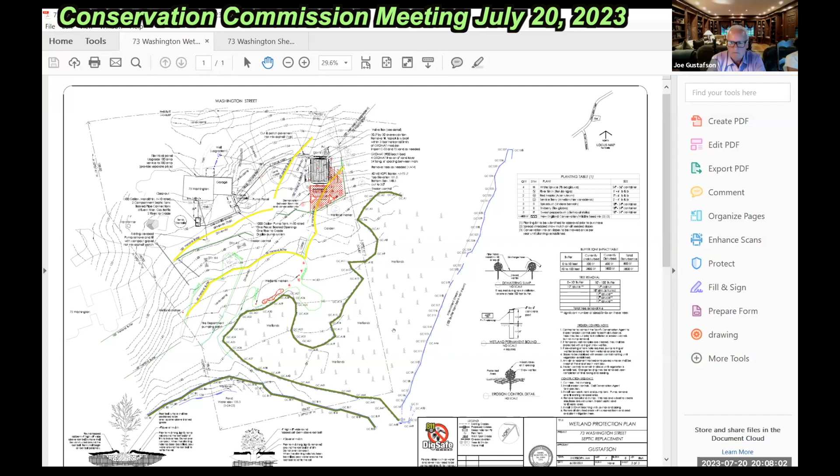Let's go back to the deal, getting the planting numbers solidified and some species, because as was said, you can come back to us with some changes in terms of what the species are based on what you see out there. As long as they're native and match the canopy thing, you can work with the agent to get approval of that. It does not have to come back before us.

So where we are now is that we have essentially 6 trees, let's see, is it the 6 trees here? Yes, we've got the 2 above, the 4 down to the 6 trees, and the 2 service berry, the river birch too. We've got 7 trees and the 2 service berries. We have 9, we have 11 shrubs, counting the service berry as shrubs.

Basically what we want is the red maples are good, all the shrub species choices are great. The issue is we want canopy trees, the white spruces should be swapped for something more likely to survive. Right, the white spruces are canopy trees, but they're not native to Massachusetts and they want to be in the northern mountains. So we just need to swap out, can be just red maple. We can specify that as a condition. We don't have to have a change plan necessarily. Right, right, that's the idea.

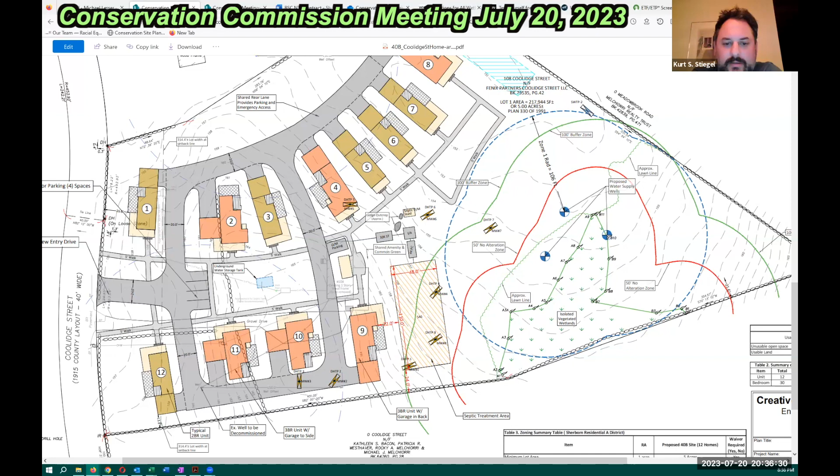I don't see everybody on my screen, so speak up. Hey Michael, this is Kurt. Yeah, no, I think the points you raise are good, and I would support you and Courtney and Joyce writing a letter to Mass Housing. Okay, I agree, I agree.

Okay, so the septic flow, we have the water supply. Can't remember what my other point was, was it just the grading issues? We don't know what the grading is. Did I have a fourth point? Without having to listen to the minutes, I should have been writing them down. I don't think they're increasing the amount of lawn. Okay, so maybe it's just that.

Do you want to mention the isolated wetland, Michael, or is it really so insignificant? No, that is the issue, but we'll just note that it is a wetland. That's not an issue at this point. Okay.

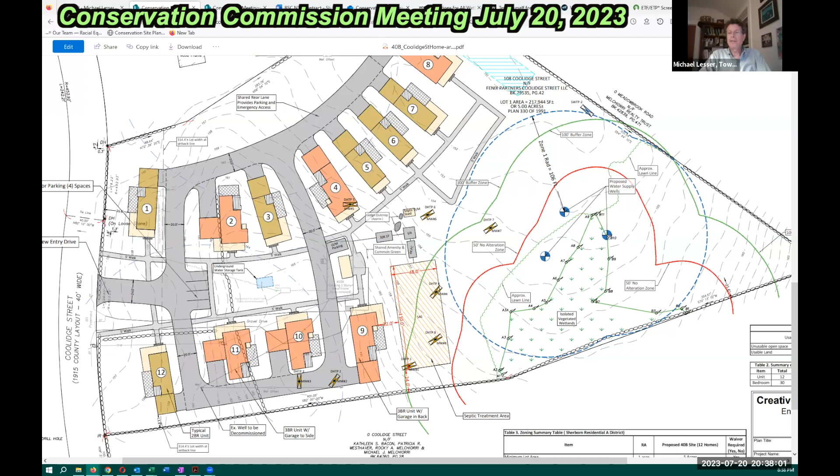I move that the commission submits a comment letter with the issues noted, to be written by Courtney, Michael, and Joyce. Do I have a second? Second. Okay, any further discussion? Roll call vote. Michael, aye. Steve? I think I heard an aye. Kurt? Aye. Courtney? Aye. Okay.

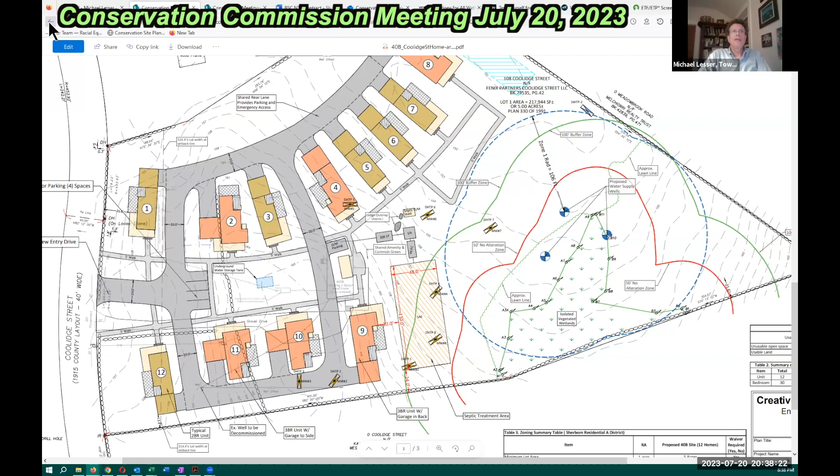Now, going back to this other project on Farm Road.

Now, I'm going to just show this for a second here. This project is further along. They've made an application to the ZBA, and the ZBA is starting on August 1st their hearing process, for which they will decide whether to grant a comprehensive permit or not, and if they grant a permit, what would be the conditions that are part of the permit.

Part of the application, for everybody to know about, is that since the ZBA is representing this 40B hearing, the ZBA is our representative for any other local board in terms of local issues, either regulations or other concerns. What happens is part of the application is a negotiation in a way. They submit a list of waivers from all of the local regulations that the ZBA has to consider whether they will grant. These are often for setbacks and such.

As you can see here, they have gone through here, I think there are about four pages of waivers here. This is related to the rules of the comprehensive permit. I don't spend a lot of time on this, but they're asking for waivers for some time limit stuff. Then they go into waivers from the zoning bylaw.

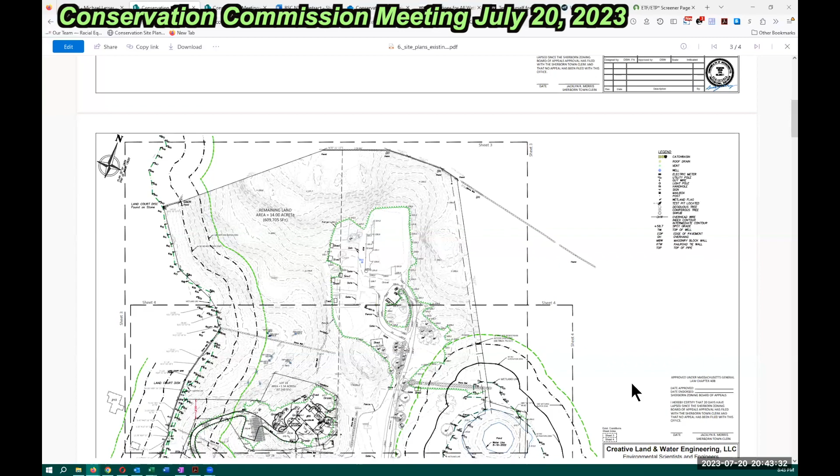I can tell this is the best page, maybe. It's a little harder to read, although I think this is existing conditions. Forgot to, I think it's maybe just the first. What we need to prepare for, I can tell which is the best one to look at for just an overview, but maybe the first one is, I forgot. Oh, here we go.

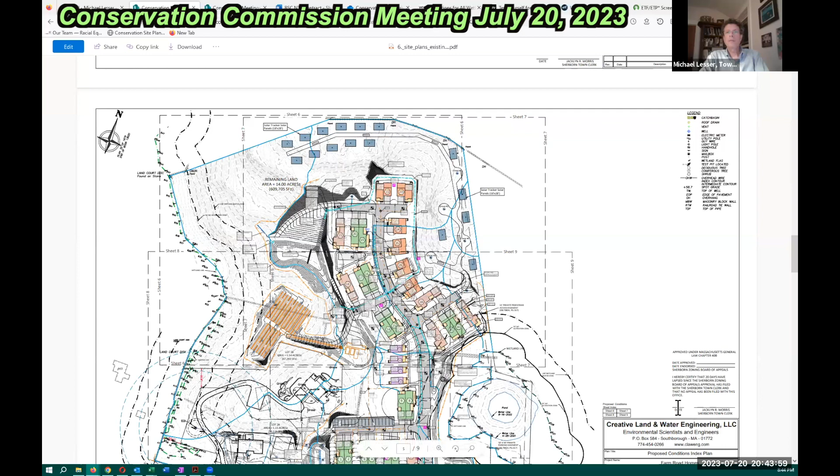This is an example of the whole project. There are wetlands on the left side, and there's another isolated vegetated wetland here, and a land subject to flooding on the east side here. Which actually, I guess this is almost sort of north-south. Oh yeah, you can see it up here.

This one here, there are concerns about the fact that there's a road that's in a buffer zone here, to this here, this is the wetland here. So we have buffer zone and there's a road that's going through it. We have some concern, and some of the houses, back of the houses are in the outer buffer zone. I think the solid line is the no alteration inner buffer zone, even though this is a 40B and doesn't have to follow our rules.

They have basically tried to keep everything out of the 50-foot no alteration zone, except for maybe a well. I can't tell if they move the wells. Those tend to be more temporary disturbances. And it looks like on this side here, they've kept everything outside of the buffer zone, except they have a very large septic system that is just perched on the edge of the buffer zone, so we have effluent considerations that the best we can do is probably just try to monitor that.

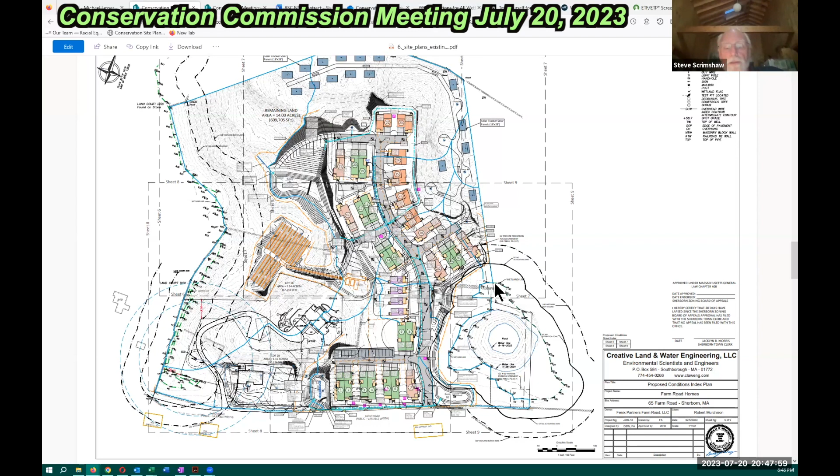I have a question — looks to me like they might be putting fill within the 50-foot buffer zone, around the pond. So they'll be filling in that — is that right? This plan seems to show their fill outside the 50. Well, there's some fill right here, by the erosion control barrier. There's a little bit of fill over here by the septic.

But it's an interesting issue to see how this works out. That would be the NOI, that's the permitting at the state level.

At the ZBA level that's starting up, we have to think about — at our next meeting we'll try to prepare something to think about what concerns we have about this project that may be conditions we want the ZBA to consider putting in at the local level. That's something we're not going to do tonight. I just wanted to introduce this, that at our next meeting we stick it on the agenda as a discussion item to see what concerns we want to raise at the ZBA level.

One other question, if I may — I see that the water line is from April 28th, 2021, and that pond, as we all know, can get really big. I don't know, certainly with climate change, but has it gotten bigger than that, Joyce? Do you know if in 2022 and 2023 that line was farther out?

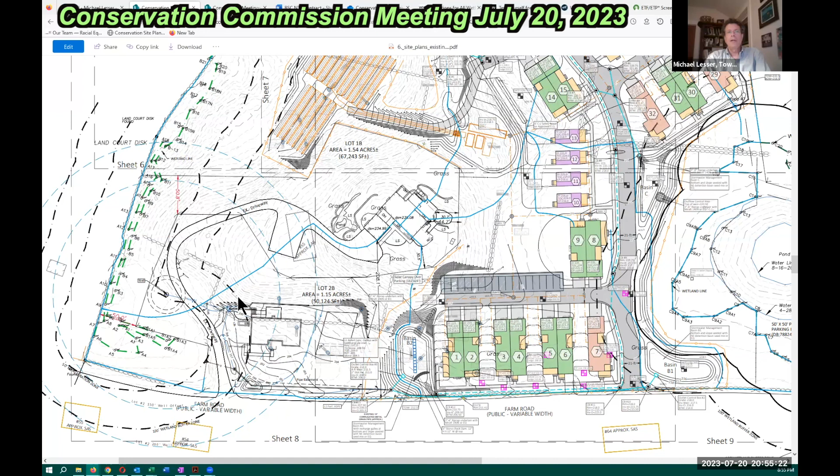Okay, so this will be — yes, go Michael, I apologize, Tom Trainer. Sure. Are you taking any public comment at any time? Oh yeah, sure, no, by all means, since I can't see everybody. Can I point something out?

If you go back to the pond end of the plan, actually to answer Steve's question about sizes — I think most people are familiar with this property just driving down Farm Road. But do you see the current road or the planned road? Yeah, this one here. Right, that's actually about 20 or 30 yards east of the existing cart path, which is all the way over.

I believe I've seen, and I'll have to dig them out again, aerial photos from a year ago when this first came up in the first round of things to mass housing. This pond, which is a little mini kettle pond, as you see from these two dates has a big range in coverage, depth, and diameter — that pond reached the cart path at one point, 30 or 40 years ago, in particularly wet years. So that's actually a question leading to a question to your board.

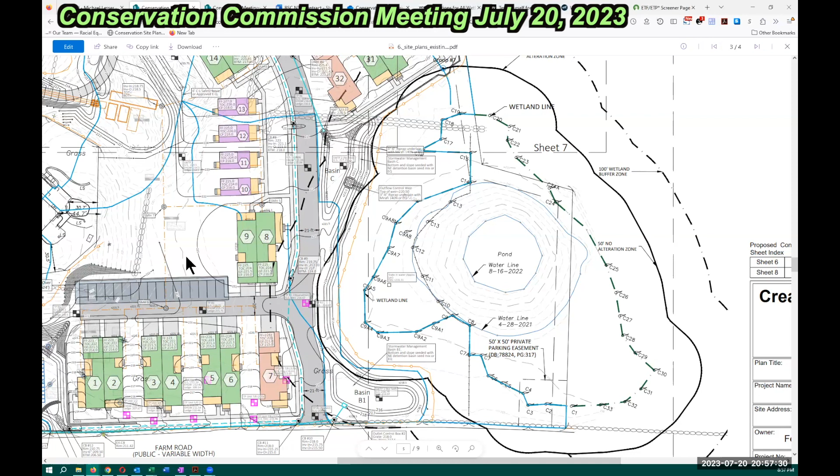You're starting to see ponding at some of those houses. I'll just say that issue—you see the grading that they're putting in here. That's grading the road up to about 220. Oh, they're adding elevation, so they're basically building up to 220.

If you look over here where some of the existing stuff is, can't quite see the outline of the current path, but these are things around 217, 218. What's this existing one here? I can't tell, that's a 220. So I think that's grading—they're basically protecting the road by creating this berm, so to speak.

But that will basically be crimping the stormwater, the flood management capacity. That's what's going to happen. That's where the issue will come up—by curtailing the flow of water that might have gone here at some sort of large, who knows, 50- or 100-year event. It might not flood the road, but where's all that water going to go?

That would previously possibly flood in this area here. To what extent? Because this is 217 down here, and 218—they're basically saying water would start flowing rather than this way, it might go the other way. It actually does go to the right, to the other property too.

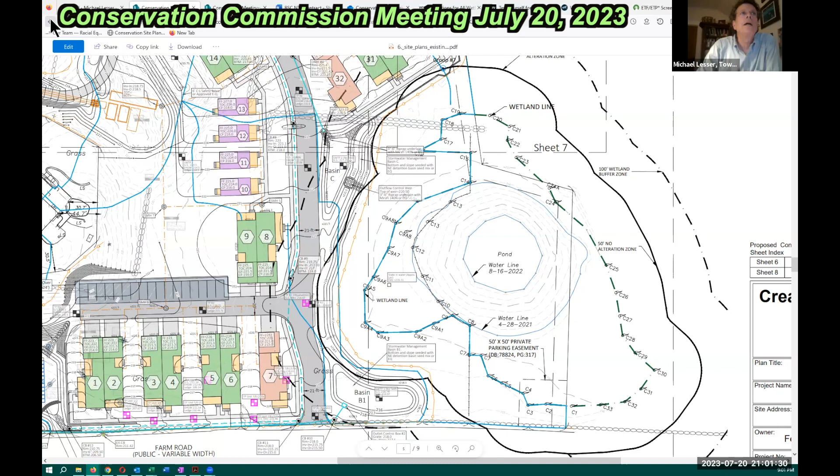So look at this stuff here—there's a lot of files on the town website. In our June 20th folder I'll move it all over. There's this July 20th one too, where I just moved over some of the more relevant stuff for us.

Michael, there's one more hand up. Oh good, well I can't see it. Yeah, Michael, it's Sue McPherson.

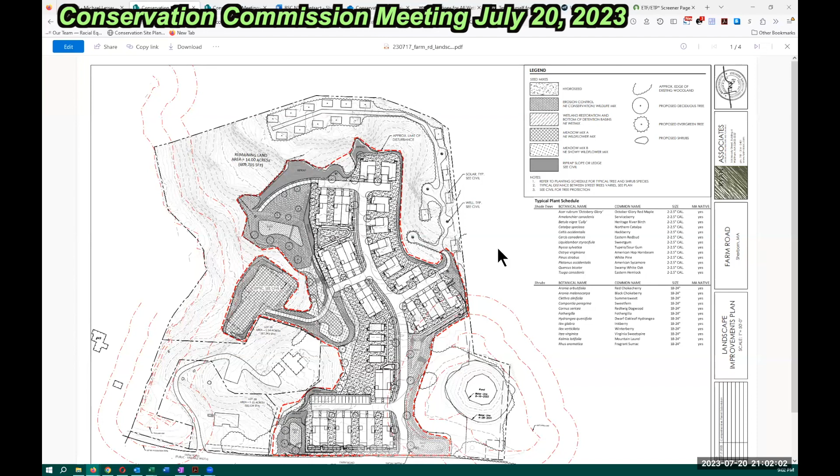On that map that you had, the one thing I would just like to point out—and you may have said this when I had to step away—but on the lower right-hand side of the map, where it had the little parking easement, it looks to be that that's in the wetland buffer as well. So I'm not sure if that's something the commission would want to address.

And you have to go down here through the scenic historic farm stone wall to get to that as well. No, Michael, it's a little square—see the buffer zone around the pond?

Zoom in around there, yeah, it's a little square. It's an easement—I don't know that they're actually building anything there. Oh yeah, this is the easement. Well, in the very beginning, on the deed when he filed this, he's granting a parking area for access. Oh really? Oh, here, okay.

Yes, we'll have to bring that up at the ZBA hearing, I thought, since this won't fall under the state. This is not a state-level area.

But it impacts not only the wetland buffer, but also I think there's some trees there as well as the stone wall. Oh yeah, no, we could raise it, but that would have to be accepted by the ZBA, because we can't do it under the state filing, given that there's no buffer zone around this kind of resource area.

Got it. Okay, so at the state level we have it at the local. That's a good point, so we'll have to add these things. Hopefully be here at our next meeting when we do this, and maybe we'll have to pick a time for it so people know. Although given some of the way hearings get continued and not, we'll see what we can do.

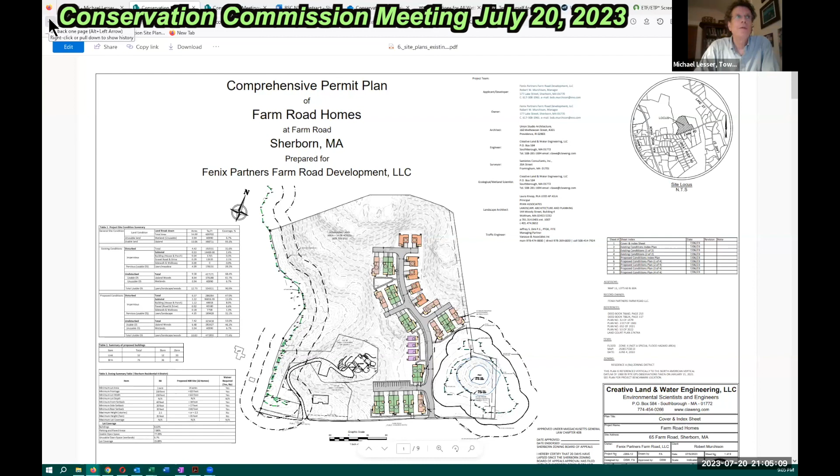Let's cover that quickly here. This was for, what was this for? That is for the plaque signs, the wetland markers that we asked to use. We only have about four remaining. How many of those, what are they? We get about 30, so they're about $10 each.